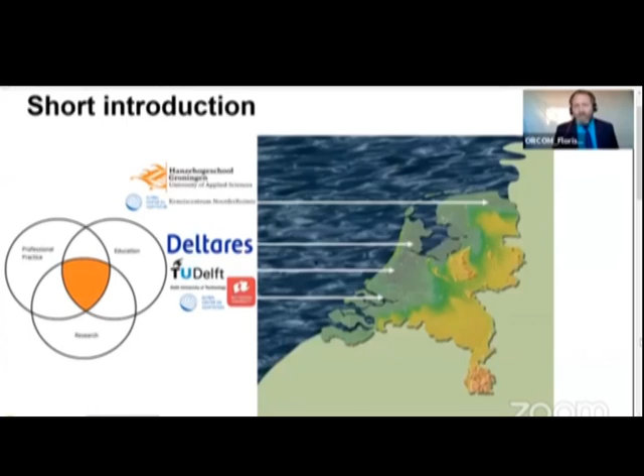Just because Joan already said a lot about my positions, remember that the different positions reflect a triple helix. For implementation of green infrastructure, we need education, we need professionals, we need research, and that's the backbone of this presentation. So that's why I have different jobs, so to say. And all these jobs in the Netherlands have one thing in common: if the dikes would break, we live under sea level, I would be out of a job.

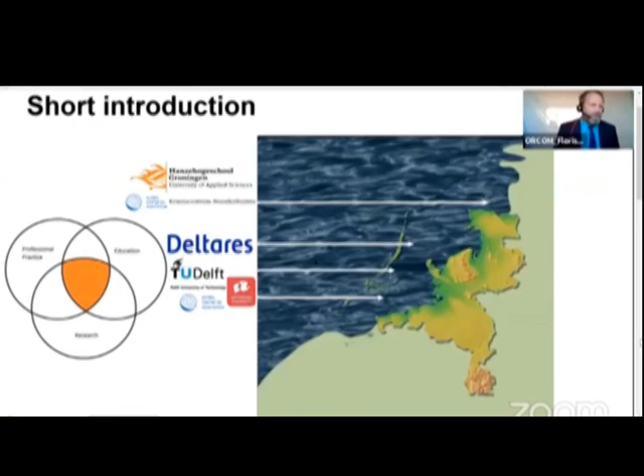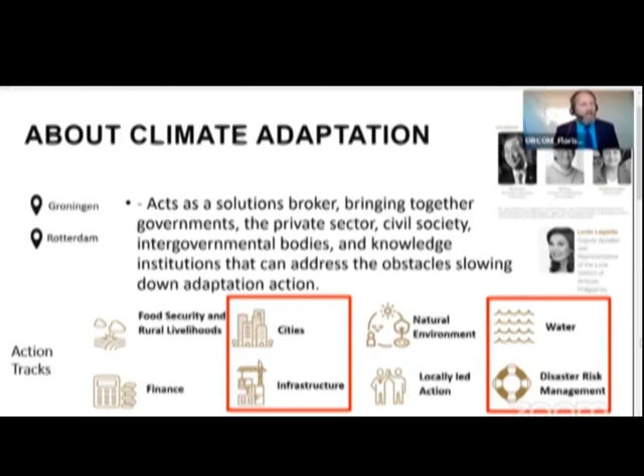As Joan said, I work at the Global Center on Adaptation, which is mostly a solution broker on climate adaptation. It's a very broad topic. Today we're going to talk about cities, infrastructure, water and disasters, but it's much wider than that. You're well connected, as the Philippines, all over the world with this, as you can see with some pictures of people in the commission in this case.

Since it was asked to bring some building standards or inspiration, the two offices of the Global Center on Adaptation have a very high BREEAM certificate, the highest, so to say. On the right you can see a map with more than 2,000 buildings in the Netherlands that have a BREEAM certificate, 77 of which have an outstanding one. I'll come to that later, but of course it's related to water.

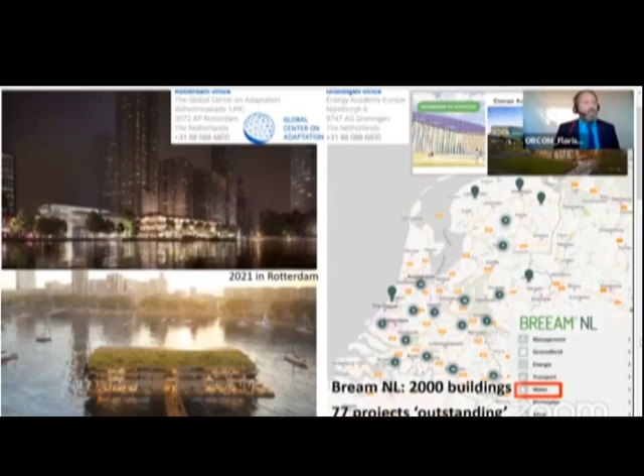On the left you see a visualization of the office in Rotterdam, what it will be. You can see it's green, but it's also floating. One of the most resilient aspects of green buildings is if you have drought and floodings, if you have floating urbanization, it just goes with the flow, so to say. But, as you know, it has to be built.

I'm a civil engineer, and in the picture on the right you can probably relate to that. First we have a sketch with great ideas of green infrastructure. Then we meet with the client, and maybe the ambition is a bit less. Then we have working drawings, and after construction it might look like a normal building. I think that is key for today—let's discuss how we can keep that ambition, how we can keep green infrastructure.

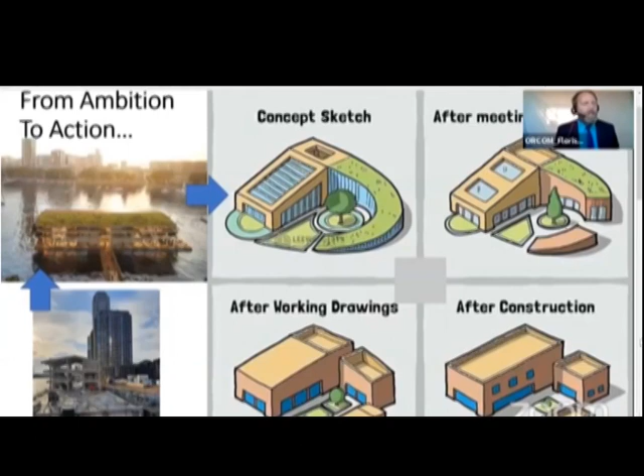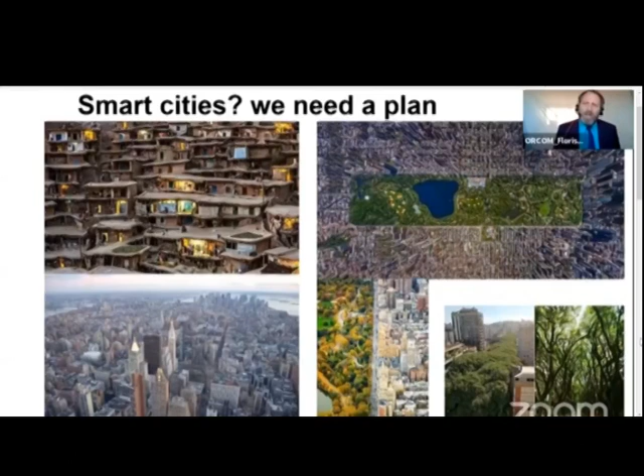Well, these are smart cities—question mark. What you can see here is a picture of Manhattan in New York. You see Central Park as one green element in the middle. It's nice, but for heat stress and drought, we need every drop where it hits the building to be reused, to be infiltrating, because of drought it has to be used for heat mitigation. So we need global green infrastructure throughout the city, not centralized in one place. Buildings can be a very key element to achieve that.

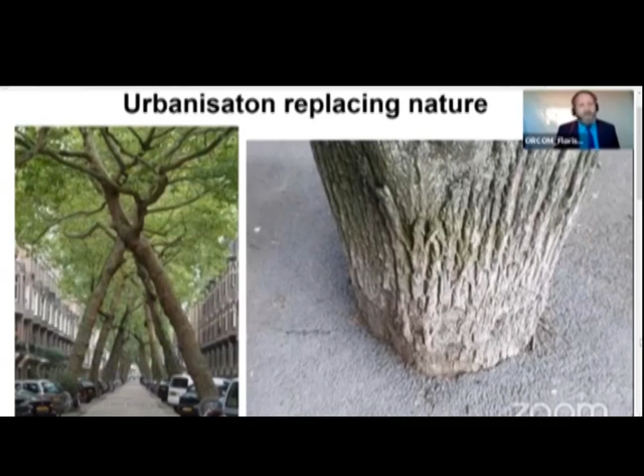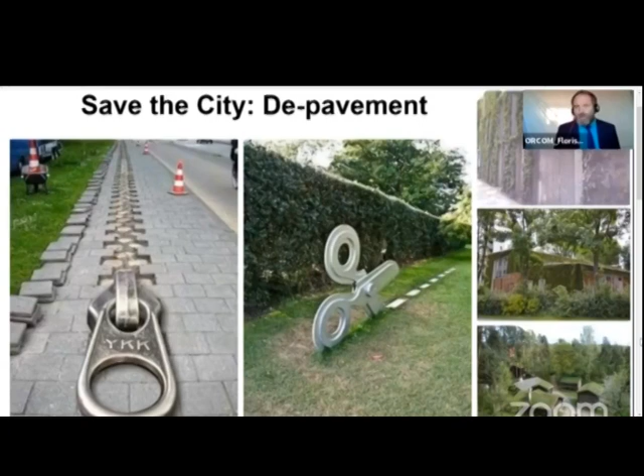We've already seen a lot of examples, and these are great examples, some small, some very big, but the greatest examples, just to browse through it, are of course multifunctional buildings.

Not having the task only for water, but also, as John introduced, more elements like the system diagram and energy, food, water, green and public space. And it should have social science, should have education. It should meet a lot of ends.

There are a lot of examples I could talk about for days, but I'll just highlight some. In the bottom right corner is a smart building that holds a lot of water in rainy times to access during drought periods. It's smart because it listens to the weather forecast, so it holds the water and reuses it when needed, and releases it when we can.

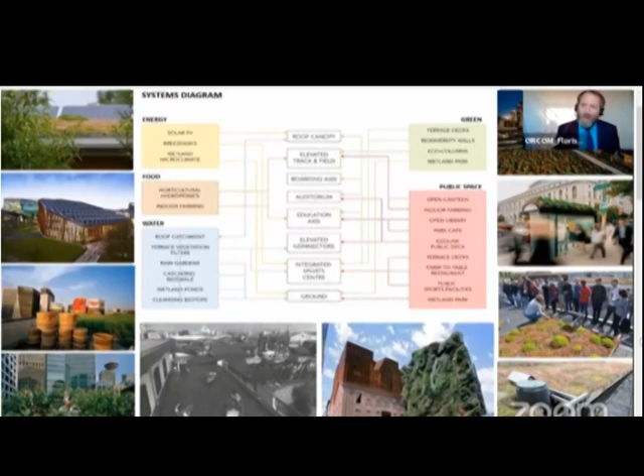And maybe the black and white picture, not the best picture, it's in Japan - people canoeing on a roof, which is very inspirational. Of course, it's about art, it's about recreation, etc.

So, like a bad marriage, let's make a list. Why are we doing this, or why are we not doing this? Of course, there are 101 reasons to do it, like biodiversity, heat stress, and all the challenges I just explained. But let's open up by why not.

Of course, there's budget involved - we can do it cost effectively, there are a lot of examples for that. Sometimes there's no space in urban dense areas to implement them. There could be a lack of legislation, that's why we talk about standards, for example. And it could be something you just don't like - it's aesthetic as well. But I'm going to show you some examples, and I really hope, and I think most of you will like it.

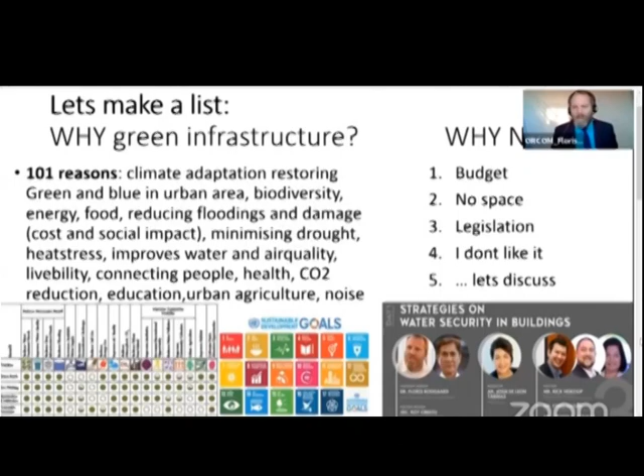But of course, this is for the discussion later on. So we're talking about the benefits, and we can calculate what the benefits are. And if we talk about cost, you can see if you put the benefits to cost, then it will be cheaper actually, because you raise a lot of issues and fight a lot of challenges.

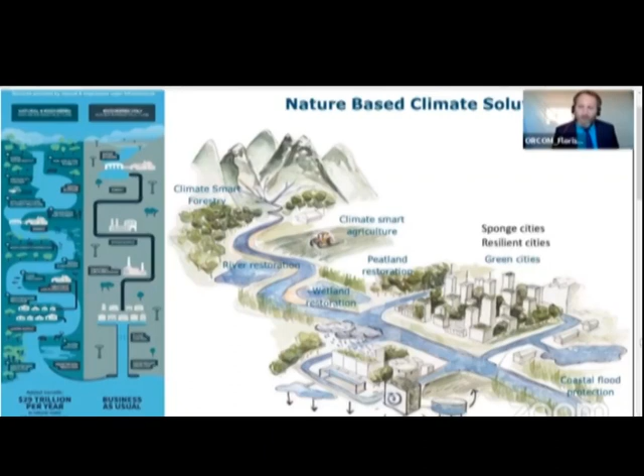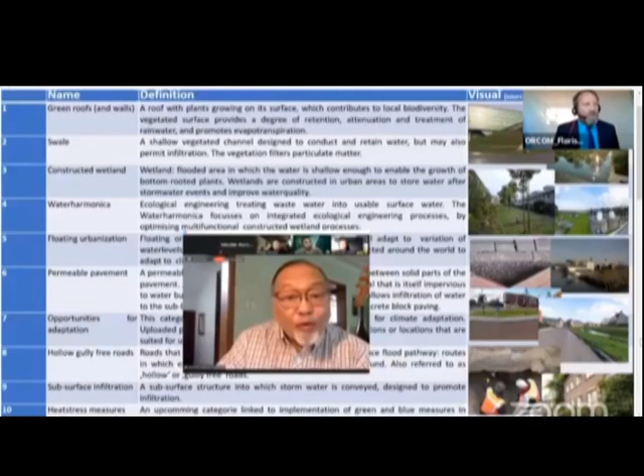What is very important as well is: doubt is the origin of wisdom. So we have to test them, because in every country it's going to be different why we implement green infrastructure and also how it functions. One of those research things we have to do in a triple helix setting is Climate Cafe. We did some in the Philippines and basically all around the world.

So what we do is basically test green buildings - what is the effect on heat, how does it retain water so we can reuse it, for example. And that's one of the things I would propose to cooperate on together. And of course, there's a lot of science involved.

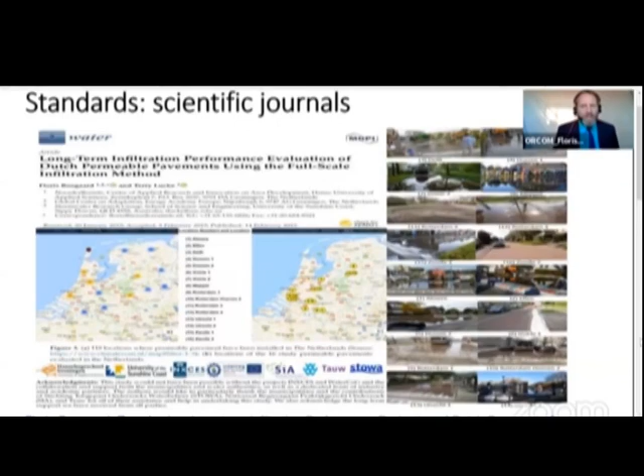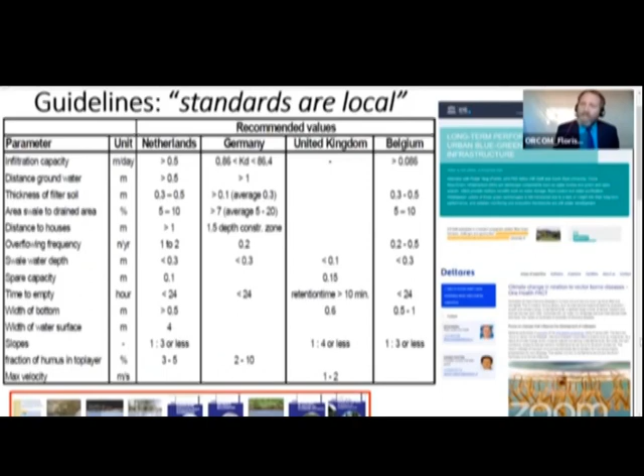And that's, of course, the message: don't copy things from Europe or the United States to the Philippines, because there are different reasons. For example, we don't have a lot of malaria, so if you retain water, that could be induced. And there's a lot of information we can use, because some standards are, of course, international. So that's one message I would like to give.

But the main message I would like to present is to be inspired. And one of my hobbies, which might be a bit weird, is I go to different green buildings and I map them.

Just for knowledge and international exchange.

These buildings on the right, you're probably familiar with. That's in Milan, the Bosco Verticale, the vertical forest. It's featured in most introductions of green infrastructure conferences. But how do we find this inspiration?

How can we find information about the standards, etc.? One of the international platforms is climatescan.org. You might have heard of it, but there are even more green buildings being uploaded in the last week, probably related to this conference.

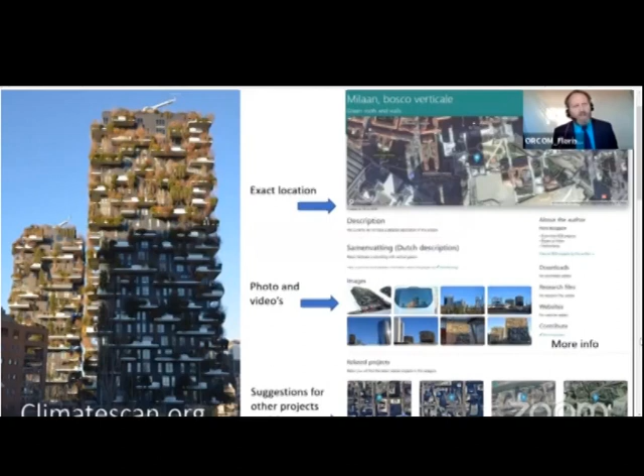So there you can find Bosco Verticale in Milano, for example. It's quite easy to go - you get the exact location, photos and videos, and research documents about the standards I've been talking about. What's surprising is that the Bosco Verticale is being copied, which is a great compliment all around the world.

It's in Singapore, Vietnam, Berlin. That's quite nice - especially during COVID, you can just visit those from your desk and go around the world. You'll also find buildings that are food production buildings.

For example, here in Sweden, where everybody in this building is actually required to grow vegetables. Of course they do that with a lot of attention and motivation, but it's quite nice to see.

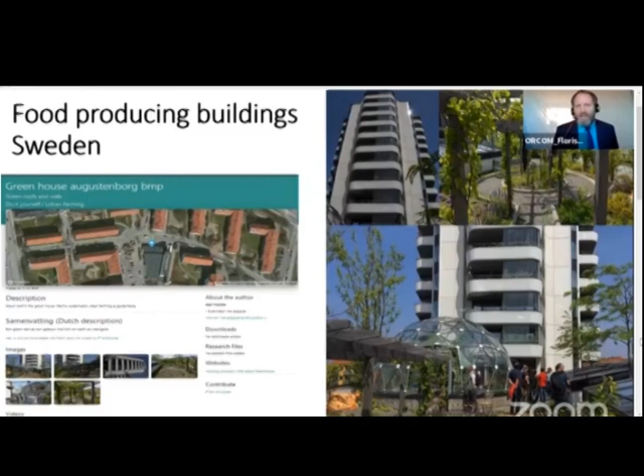Or water quality, which isn't being addressed enough. In the Philippines, having been there several times, this is a major issue. Some buildings are being made for water purification, as you can see here - wetlands on a roof, for example. That could be quite inspirational.

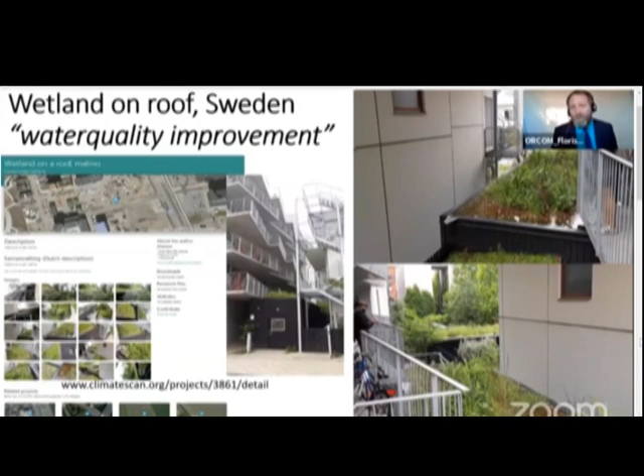In the Netherlands, there are about 1,000 green buildings already, not only with the BREEAM certificate but all around the world. These buildings with a very high percentage of green walls are from a municipality, or the next one is from a water authority - public organizations giving a good example to others. That would be very nice to kickstart as well.

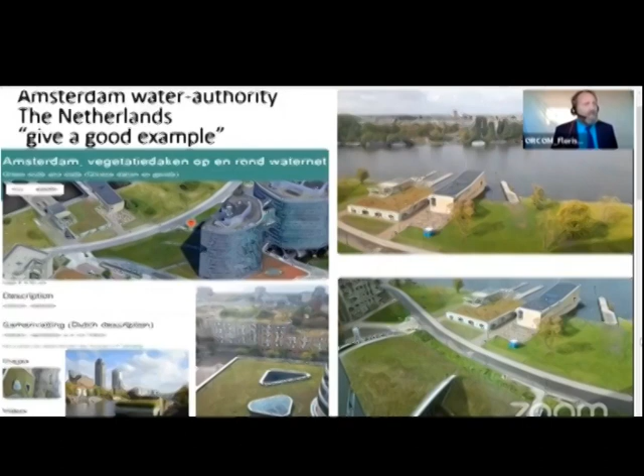Last but not least - these are individual projects, but we need a bigger scale. What can we do, for example, in Manila? Can we learn from cities like Rotterdam, one of the 100 resilient cities? Just to touch on this - this is more what Rick Heikoop is working on, being from Rotterdam, so he can reflect on this in the discussion.

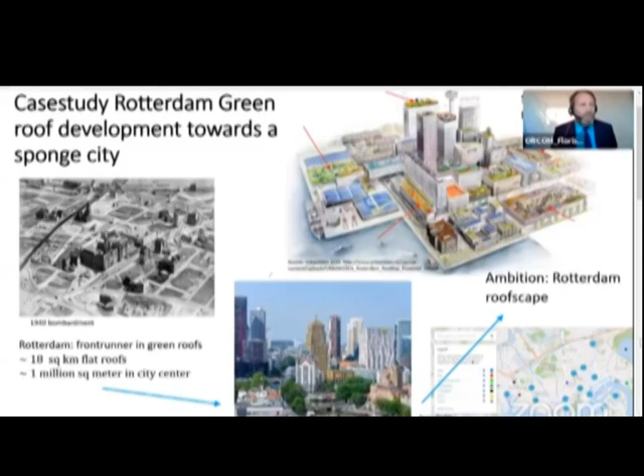So this is a case study. Rotterdam was heavily bombed in the war, so there was a lot of space to rebuild. That's a chance to rebuild in a very green way, and there are so many different green buildings and characterizations of that.

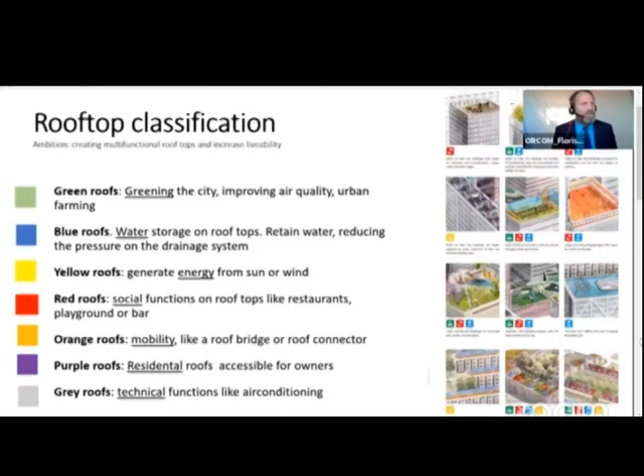There's green roofs, blue roofs - that's about water, that's about green, but also other colors that relate more to social science or field labs, as addressed earlier. The city of Rotterdam has a lot of examples with different meanings - multifunctional reasons to implement a green strategy in the world.

I'm just showing this because I think my time is up, but Rick can reflect on that more.

Last but not least, there's a lot of information - this is just 10 minutes, of course. I and also other parties of the EU or the Global Center would like to offer cooperation, maybe through the Climate Cafe I mentioned earlier, and we can discuss more during the discussions - maybe we should find buildings in the Philippines, since there are already green buildings, and let's highlight them. Put them on the stage, research them, and come to standards that are really specific for the Philippines, or other countries, because we saw great examples from previous speakers like Venezuela or Bali and Indonesia.

So I'm not going to repeat the key messages, but I hope you are inspired. I hope we can put action on the list and cooperate together. And of course, this presentation will be shared with you - it has a lot of references you can look for, for more info, like ClimateScan.

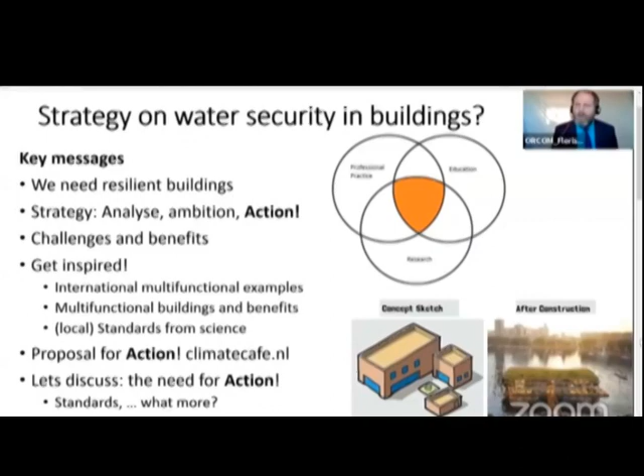So I hope this gives a bit of an introduction, Joan, to the rest of the discussion. And of course, here's a slide with much more info.